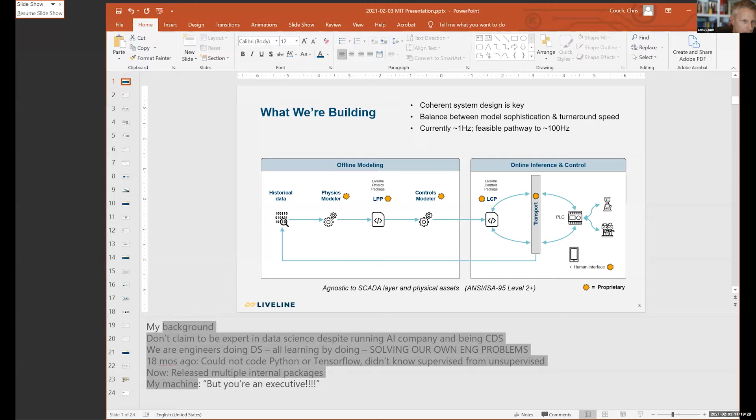Hey, Chris, I hate to interrupt, but your slides are coming across kind of small, and some people are having trouble seeing them. Okay, let me try to redo this then. That's what I was afraid of. One more try. Sorry, I'm on a multi-monitor setup. This might be better, even though it's not optimal. There we go. That looks right. All right, sorry. Yeah, if you just make that as big as you can within the PowerPoint, that's more visible. If anyone's still having trouble, let us know. The chat is quiet. Go ahead.

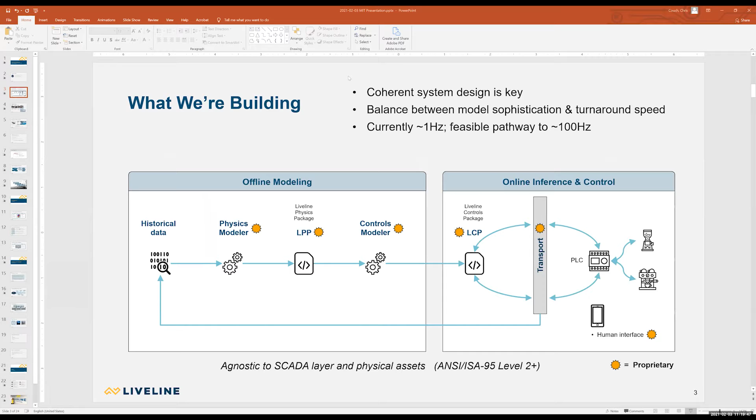Okay, very good. So, normally when I talk about Liveline, I'm talking to investors or potential other customers and do a little bit of song and dance. But I thought for this group, I'll just jump in and talk about what we're building. So this really gives a schematic for the overall stack and application. At the end of the day, we're trying to do real-time process control. And if you look at the right, in this case, I think the icons say that we're making espresso, which we certainly do a lot of anyway.

When you interface with industrial hardware, typically it's through some kind of programmable logic control layer, PLC layer, very, very standard stuff in the industry. And we're trying to reach through that layer and make real-time changes to process parameters, literally every second almost. And so, the question is, what's the easiest way to pull that off? And this is what we've landed on. I'm going to talk later about things that we tried that didn't work, because I think that's interesting sometimes. But this is really our approach.

And so there is a real-time, online inference loop for this, using a trained controller that we'll talk about in a bit. We did have to do some work to develop a transport layer. So the way that we're passing data around the stack is very particular, because there are many sort of consumers of that data, one of which is the offline modeling. So we had to build a transport layer that we could live with, that could talk to industrial PLCs through standard protocols.

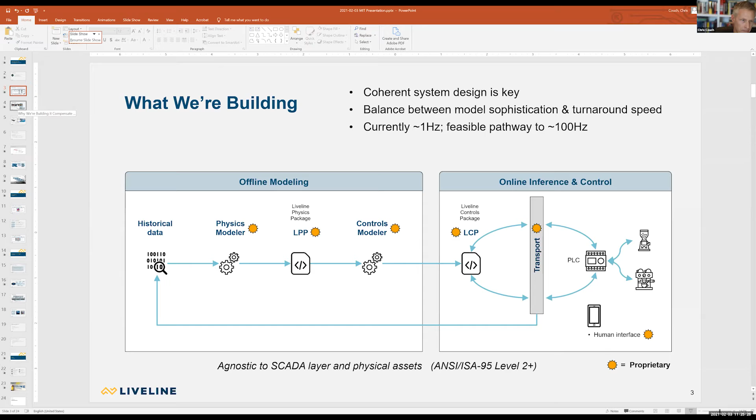That description I just gave describes several industrial verticals that span hundreds of billions of dollars of revenue. So we're talking about the wire and cable industry. We're talking about extruded polymers, weather seals, that sort of thing, and many others. So this is a very large category of industry that sits on top of all these different stages here, starting with refineries in the case of polymers. And those processes also have many of the same characteristics that we have to deal with, as well as the intermediate stages of polymer production after refining and compounding of interesting blends of things.

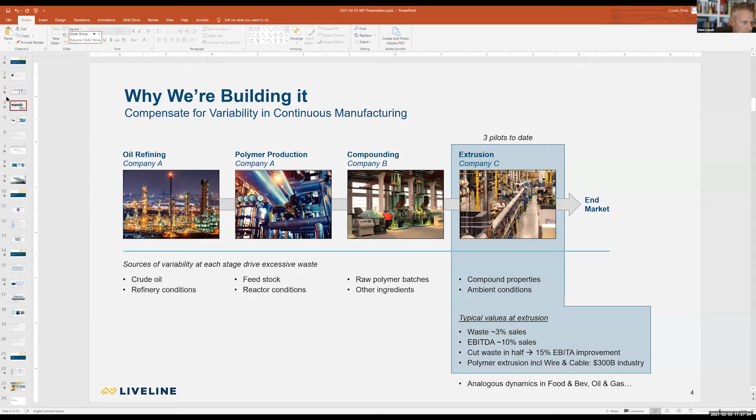You've got multiple polymeric materials. They're all reactive. They cure as the process runs. They're getting co-extruded together through dies where the flows are combining in complicated ways, and very nonlinear behaviors in that. And then you have metal forming for the piece inside. You have extrusion, you have multi-stages of ovens and cooling, and there's heat transfer, and the chemistry is going on all this time. Very, very complicated.

And to make it worse, the tolerances here are usually extremely tight, given what these products are. And there are thousands of product variations in the plants, and they change all the time because the designs get updated, the equipment gets modified, tooling wears out over time, or the raw material supply base churns frequently as our suppliers at places like Dow and Exxon change their product offerings. So a lot of churn. That ultimately is why these types of processes have not been automated.

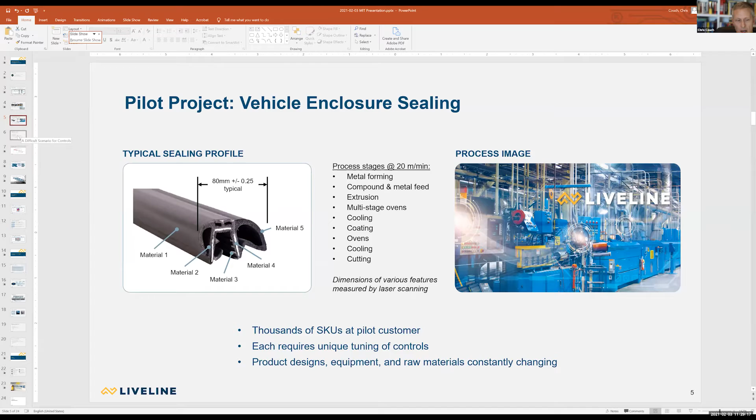And it's a difficult scenario for controls for all those reasons. And no automation means high scrap, high labor, high waste. All that means burning energy. These are very energy intensive processes. The waste is often not easily recyclable. So there's a huge footprint environmentally that the waste implies. So there's a great need to do better.

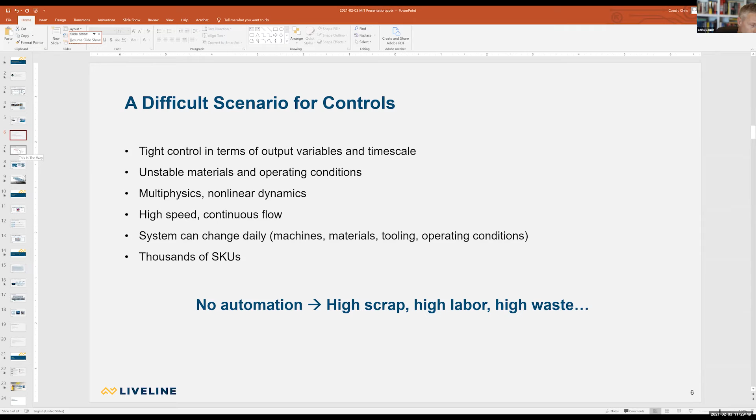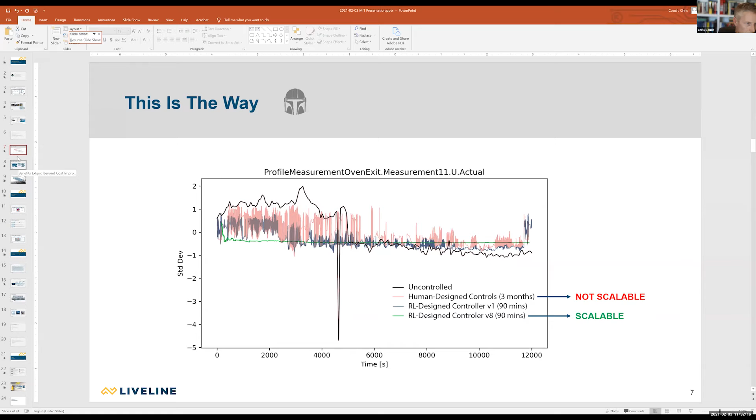Nobody's commenting on the Mandalorian reference, by the way. I figured more out of the MIT crowd.

All right. As I mentioned, it's more than just saving money in plants. There's really a big ESG footprint to these types of processes. They typically require very highly skilled labor who have developed a feeling for how to control these processes manually. And these aren't glamorous jobs, and talent is an issue. It's not easy to convince young engineers to go stare at these touchy lines for a couple of years and get a feel for it before they can really take ownership of it. That's what it is today.

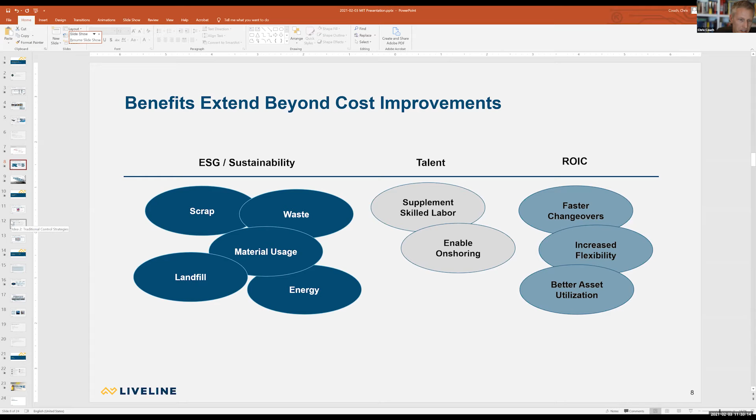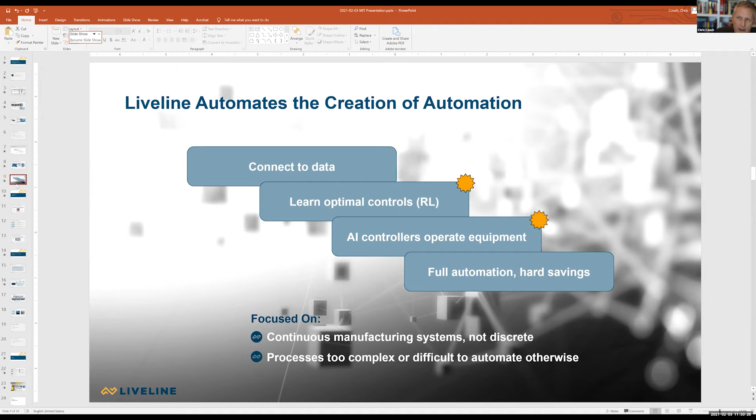So we're trying to change these jobs managing these kinds of plants into much more high-skilled, much more interesting jobs interacting with these intelligent systems. So that's the end of the what we're doing and why part. We're trying to automate the creation of automation through reinforcement learning based controllers, and really hit a category of industry that's been tough to automate in the past. So before we go into more tech, any questions at this point? I'll take a few now.

All right. Great. I do have a question. So thank you for the talk. I'm just more interested in the reinforcement learning that you mentioned to do the control. So can you talk a little bit more, like what is the reward system and how do you make sure it's taking the feedback?

Sure. Yeah, we can certainly hit on that. I don't have a particular slide on that, but I can give you some general feedback. So first of all, part of that is the secret sauce, right? We do have the ability to put some fairly complicated reward structures in. We do often use a combination of basically continuous measurements, like a dimensional measurement, but we also include in there a lot of very discrete, sometimes even Boolean types of flags for behaviors that we like or we don't like, that we want to penalize the model for. So I'll give you an example.

You may want to penalize in your reward structure coming too close to the physical limits of how you can set temperatures or RPMs or amps on equipment. So we may make some nonlinear penalties in there for those kinds of things. So we often use a combination again of continuous variables and some categorical or Boolean flags on things. For those that have played with RL, right, that's a lot of the secret is sort of figuring that out.

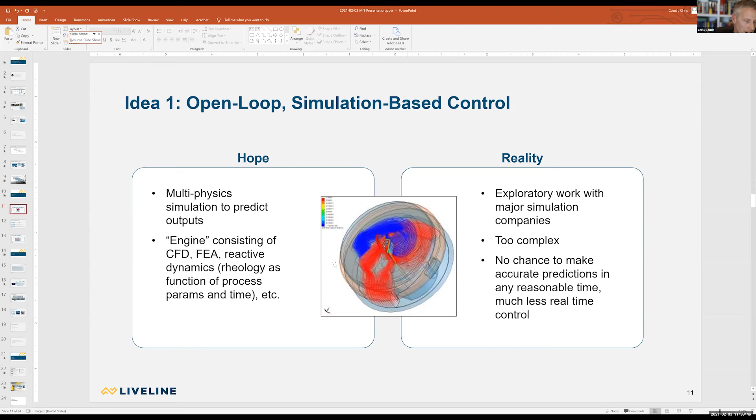So it's a little eye candy for you. So something else that we spent a lot of time on and eventually abandoned were traditional control strategies. Many of us on the team, myself included, I was a controls engineering focus for my bachelor's and master's at MIT. There's a very mature toolkit from that world.

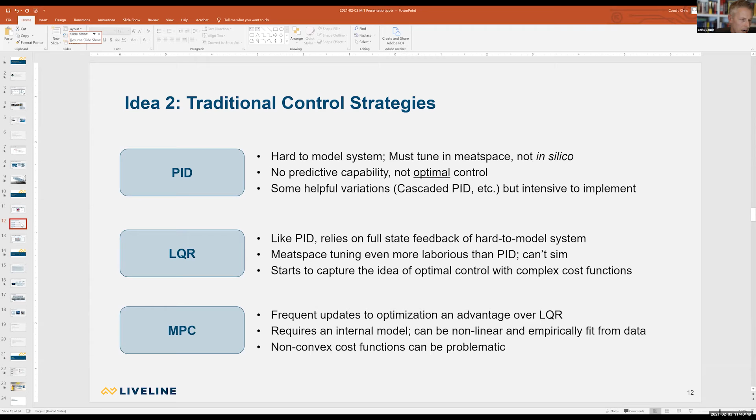One of the issues with MPCs is you do have to run optimizers for those. And if you have enough time in the real-time loop, you can maybe get away with that. In our case, that was actually restrictive. And so we wanted to find some better methods. Ultimately, we, as I said, landed on the RL-based method. Again, not before trying everything else we could think of.

We did, in fact, even go at one point, still trying to stay in traditional controls world, to do this like controls engineers. We tend to think, hey, if it's controls, Simulink, MATLAB is always a good place to do this work. And as many of you may know, and I hope you never have to know if you don't, MATLAB is probably not the advanced data science tool of choice. It's expensive. Integration into your stack is not always clear, and how to do that effectively.

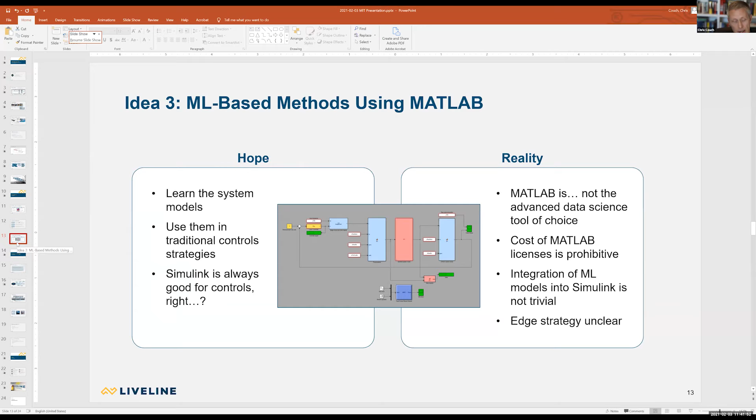So we abandoned that as well, and have gone to a pure runtime environment that you would be familiar with, right? Ultimately, the controllers are running in a Python TensorFlow runtime, right? That leads us to the right way, we think. So, we're using RL-based controllers. These have turned out to have a lot of strengths for us.

Obviously, the notion of being able to sort of self-design controllers is fantastic. If we make it work, that reduces the number of controls engineers we have to have and gives us a feasible company, actually, and a scalable model. RL controllers can naturally accommodate some very sophisticated trade-offs in the objectives. So good question from Elva earlier. It's very natural to do that in these models. It's not so natural in other types of traditional control strategies.

I will also point out that the infrastructure that it takes to do what we're doing turns out to be very useful for some other tasks, one of which is anomaly prediction. And we'll look at that on the next slide. That's not our product focus right now. We're working on the controls problem, but because of what we're doing, we can do that almost for free in terms of additional functionality. And again, I'll mention that on the next slide.

And then also, because of the way we're doing this, it really opens the door for data scientists to work on controls using some familiar tools. If you're a controls engineer in industry, you have to know MATLAB, you have to know how to program PLCs and ladder logic and some really ugly programming things that I hope you never have to learn, but that's how it's done. And now all that work has moved into what you, I think, would consider to be some more familiar tools. And that is fantastic from a standpoint of accessing talent.

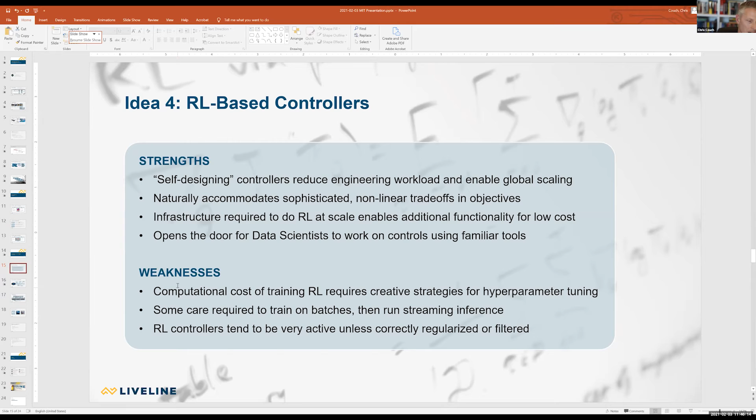We do, for example, put in some safety valves, if you will, in terms of if-this-then-that type of wrappers around what the RL models tell us they want to do, to trigger certain limits or clipping or whatever we want to do. But you do have to be careful accepting the output from these models, as you would with any output from any model, right? But in this case, it's physically altering hardware in real time with some dangerous things. So you just got to be careful.

And if you talk to startups, for example, that are doing anomaly detection or analysis of drivers of bad quality, many times they deal with ex post outcome information, and they're using classification algorithms or many other approaches to try to get some insights, and that's good work. What we're doing is different. I think we're in at a very low level. We have sensor level data as part of our controls engine.

We have a physics model that is making real-time predictions, updating every second or so as to what it thinks the outcomes are going to be in the future, and those predictions are driven by a very low-level model, if you will. We have that as part of the control loop. And so already, for example, in our controllers, we do have a variety of flags and analytics coming off those predictions that are telling us things like, we expect to go out of quality tolerance in the next couple of minutes. We're not exposing those right now as products, for example, but we could.

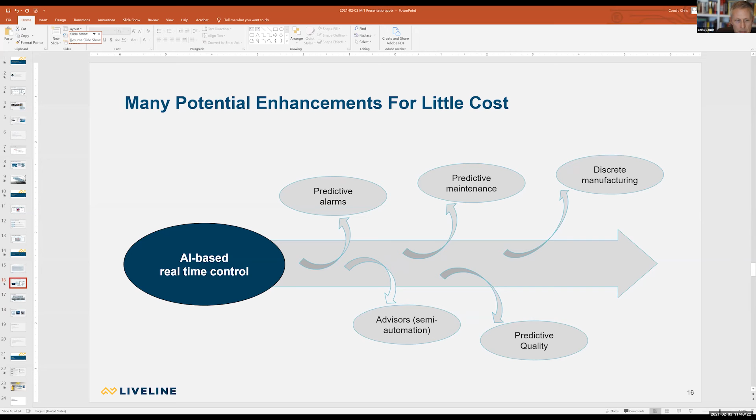I mean, the hook is already in there. And to put a front end on that and expose it, the R&D cost, product development cost, is almost zero for us. So those are the types of things that we can do using our stack, and that is also why we're excited about the company and the way we're approaching it.

We can have a lot of listeners to the data from the equipment, not just the inference models, but also all kinds of monitoring services and reporting services and that sort of thing. Archiving services, for example, as well. So it's turned out to be a really cool choice for us.